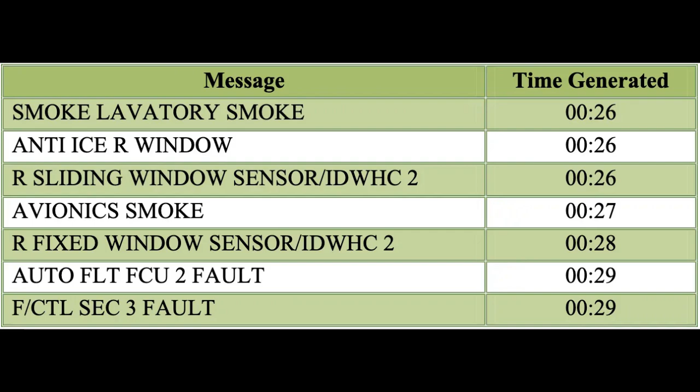The type of ELT fitted to most modern airliners, including the accident aircraft, is designed to transmit an automated distress signal when the device is subjected to a certain level of longitudinal deceleration, in this case between 2.0 and 2.6 Gs. 2 Gs of longitudinal deceleration refers to a reduction in forward velocity that causes objects inside the aircraft to jerk forward with an apparent force equal to twice that of Earth's gravity.

The level of deceleration required to impart such a force is high enough to represent a relatively reliable indicator that the airplane has crashed. Therefore, it seemed reasonable to assume that the activation of the ELT represented the time at which the aircraft impacted the sea.

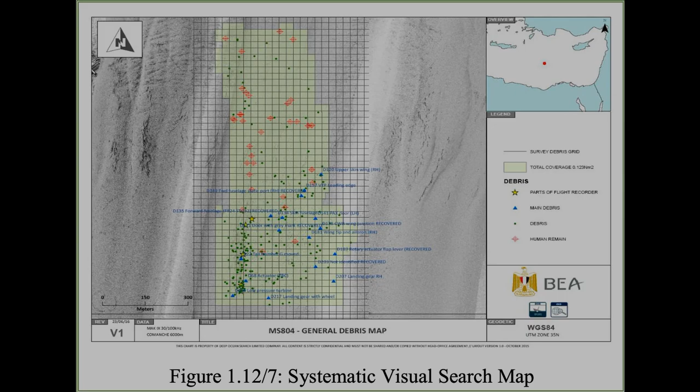From the very beginning, investigators had seriously considered the possibility that Flight 804 was brought down by an intentional explosion, despite the fact that no claim of responsibility had been forthcoming. But the speculation about this possibility came mostly from the Egyptian side, from figures like the chairman of EgyptAir and Egypt's aviation minister. Terrorism had not been officially ruled out, but by the end of the summer, European analysts believed an accidental fire was more likely.

However, on the 16th of September, French newspaper Le Figaro reported that traces of the high-explosive TNT had been found on the remains of several crash victims.

Although some remains were found floating on the surface and others were recovered from underwater, the initial reports did not clarify to which group these remains belonged.

But according to Le Figaro's source, the French investigators wanted to study the remains' chain of custody in order to rule out potential post-crash contamination, only to find these efforts stymied by the Egyptian judicial authorities.

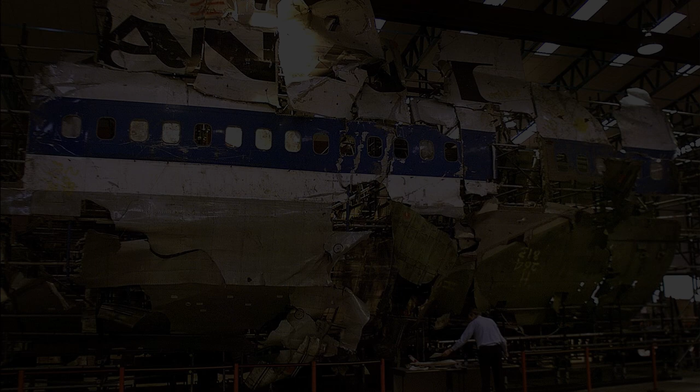Photo of reassembled fuselage of Pan Am Flight 103. Part of the reassembled fuselage following its destruction by a bomb over Lockerbie, Scotland. Reuters.

In the case of Air India Flight 182, the investigation report produced by the High Court of Delhi includes detailed descriptions of various explosive signatures, including numerous small punch-through holes in the fuselage skin with high-energy impact characteristics, small pieces of metal curled in upon themselves by more than 360 degrees, a large number of tiny fragments trapped inside larger pieces of wreckage, greatly different damage in the forward cargo hold versus the aft, distinct metallurgical markers on the fracture surfaces with photographs, replication of damage patterns during experimental explosions, and circumstantial evidence, including a suspicious person who asked for his baggage to be forwarded on Air India Flight 182 without boarding the aircraft himself, and the explosion of another bomb originating from the same airport on the same day, in a bag associated with a reservation made by the same person who failed to board Flight 182.

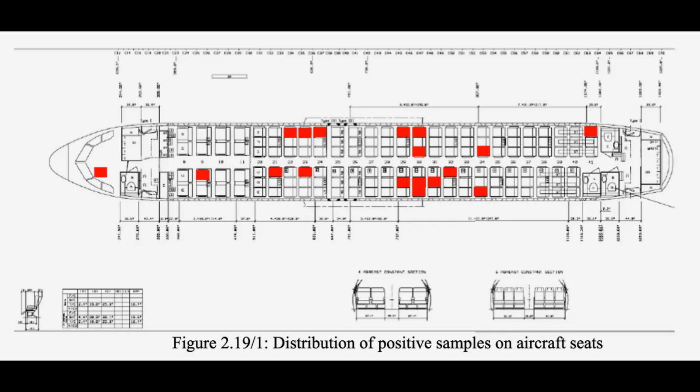The EAAID report includes some basic analysis of all of these items. For instance, the catering trolley was found badly deformed, almost unrecognizable, having been turned inside out and flattened. Regarding this part, the report states the trolley tray tracks were so worn out, probably due to gas wash, without explanation. Gas wash can be a side effect of an explosion, as hot combustion gases change the appearance and properties of metal. However, the report doesn't provide any evidence, such as photographs or surface analysis, that clearly demonstrate gas wash. Nor does it explain what worn out means.

Instead, the report says, quote: '2 sides of 2 trolleys, together with a part of galley composite wall stuck within. This feature is known only to result of the venting of high-pressure gases and rolling over the sharp fractured edge in a direction away from the venting gases.' End quote. I had some difficulty understanding what was meant by this line, largely due to the bad grammar, but...

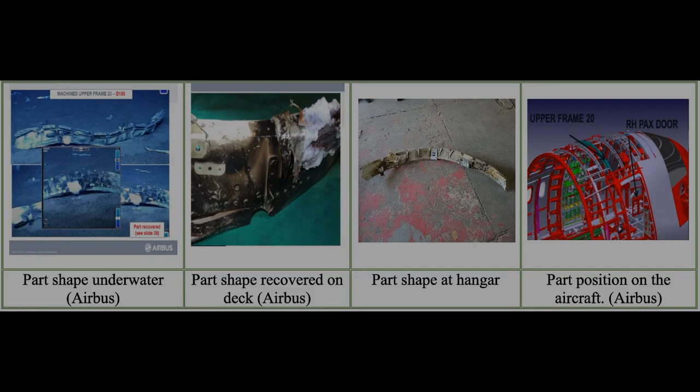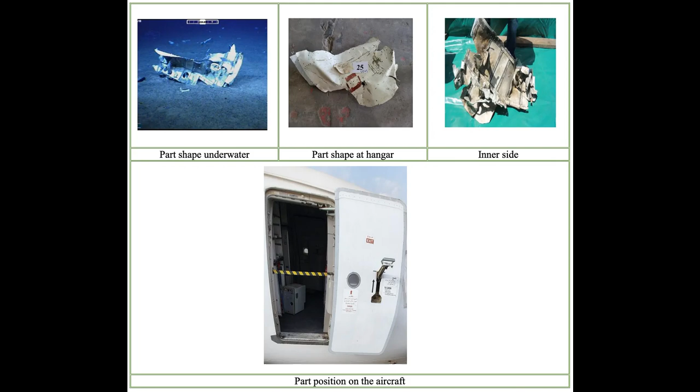The third piece of wreckage mentioned in this part of the report is the upper third of the right-hand forward passenger door, which was completely torn away from the bottom two-thirds. This part displayed what the EAAID calls outward buckling, as well as possible sooting on the interior face. The report cites all of these aspects of the door's condition as evidence that it was exposed to an explosion, but once again, fails to explain why this damage was not caused by an in-flight fire followed by a high-speed impact.

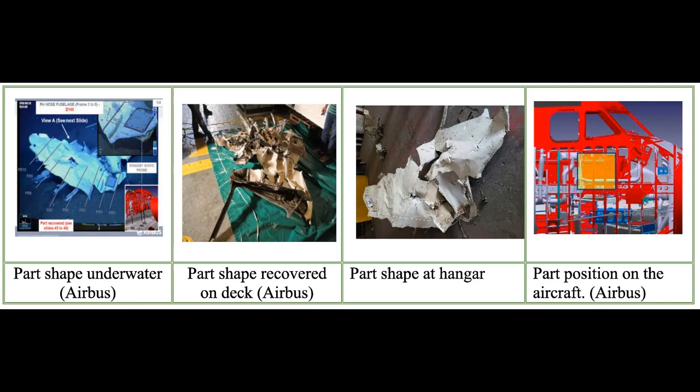The fourth part given special scrutiny is a section of fuselage skin located near the first officer's seat. The report repeatedly highlights intact wiring attached to this part that didn't appear to have been affected by fire or heat. But more detailed photographs in one of the report's annexes tell a different story. Two photos of this wreckage, identified as part number 31, show significant sooting and charring on the interior face, apparent even to the untrained observer. An expert with whom I shared the photos agreed that they represented clear evidence of fire and/or heat damage.

The BEA also agreed with this assessment, listing part number 31 as an item displaying traces of soot and heat exposure in its comments on the Egyptian report. Photo of fire damage on part number 31 is clearly visible in this photo from the report's appendices.

In its response to those comments, the EAAID admits there is soot on part number 31. While it doesn't try to explain this in its report, its response to the BEA comments argues that some fire and smoke could have spread forward after the explosion, but that the fire could not have started here because nearby wiring was undamaged. The BEA wrote that this argument was false and misleading, because the wires in question were located below the cockpit floor level, while the fire damage was above floor level. If the fire started in the right side of the cockpit, this would have insulated the wires from the flames and heat, which tend to spread upward, not downward.

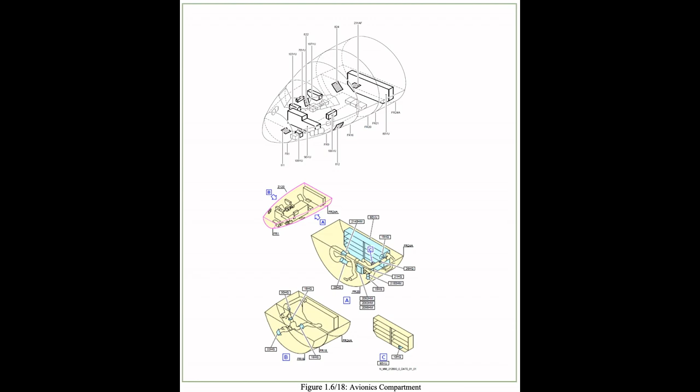As such, the failure of these systems is consistent with damage in that part of the aircraft. It is not, however, proof that the fire did or did not start in the cockpit.

The EAAID also acknowledges that the pilot shouted fire within seconds of the estimated time of the explosion, before there should have been any fire visible in the cockpit. However, the report explains that the pilots must have seen the fire on the video feed from the anti-hijack camera, which provides a view of the area just outside the cockpit door for 5 minutes after any request to enter the cockpit. Since a flight attendant had entered the cockpit less than 5 minutes before the emergency, this camera would have been active and would have shown flames in the galley.

This is an explanation for the pilot's behavior under the proposed scenario, but much like the last several arguments, it doesn't constitute proof of that scenario.

Additionally, the EAAID argues that because there was no attempt by the cabin crew to alert the pilots to a fire in the galley or cabin, that must mean that the flight attendants were incapacitated by the explosion and fire. However, as in all the arguments above, this could also mean that the fire wasn't in the cabin in the first place.

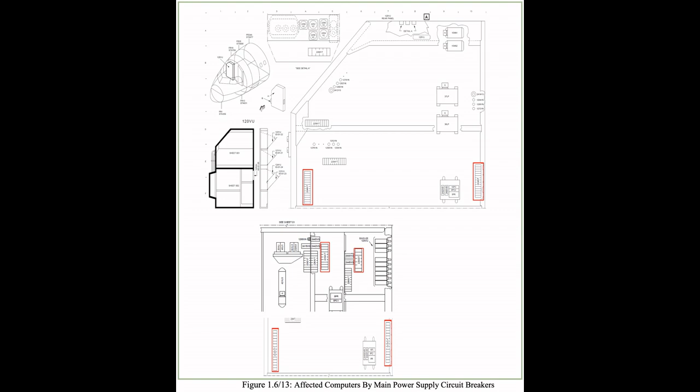Summarizing the Triple Committee report, the EAAID wrote, quote, 'This resulted in oxygen leakage and fire in the cockpit due to the presence of a heat source resulting from the explosion, flammable material, and the oxygen.' End quote. However, it's unclear to me why this argument is used when the EAAID report spends considerable time attempting to rebut the notion that there was a fire in the cockpit at all. Furthermore, the oxygen pipeline is entirely within the area under the cockpit and doesn't extend under the galley.

At the same time, in direct opposition of the findings of the Triple Committee report, the EAAID argues that there was no oxygen leak at all, because if there was, then the cylinder would have emptied faster than it actually did. No evidence for this claim is provided.

The report also argues that even if there was an oxygen leak, this would not cause a fire without an ignition source, which is true. Oxygen simply reduces the amount of heat required to ignite a fuel source. But in the EAAID's opinion, there was no plausible ignition source other than the bomb explosion in the galley. The report points out that the manufacturers of aircraft oxygen systems are required to demonstrate that any mechanical failure or combination of failures resulting in an oxygen-enhanced fire would be extremely improbable.

In the Egyptians' view, this was sufficient reason to exclude an accidental ignition source in the absence of specific evidence for a particular failure. On the other hand, they argued a heat source could be deliberately introduced, and then all bets would be off. In its comments, however, the BEA cautioned that because the probability of a fault is never zero, the EAAID should have written that they had no evidence of a failure rather than arguing that a failure could not have occurred.

When the BEA decided to conduct its own analysis of the fire aboard Flight 804 in late 2022 or early 2023, the investigators would have known that they were being tasked with finding the cause of an accident over which they had no jurisdiction. The BEA had no authority to gather evidence from any Egyptian entity or from the crash site, no ability to re-examine the recovered wreckage in person, and no opportunity to access maintenance records, view historical ACARS data, or consult personnel interviews.

All they had was what Egypt had given them before the two sides stopped cooperating. That included photographs of the wreckage, the technical logbook, and of course the all-important automatic backup of the black box data. Besides these items, the BEA also had access to expertise at Airbus and the oxygen system manufacturer, which were both based in Europe. Using this information, the BEA set out to determine where the fire started and why.

The BEA began its analysis from the most logical starting point, that is, from the first abnormal noise on the cockpit voice recording. Prior to the hissing sound at time 02524, there was no indication that anything was wrong on board the aircraft. A sick passenger had prompted extensive conversations with the cabin crew earlier in the flight, but it appeared that, by the time of the event, this matter had been resolved. Otherwise, there was no indication that the hissing noise was not the start of the accident sequence. As stated earlier, investigators determined that this hissing noise was the sound of oxygen escaping from an oxygen mask.

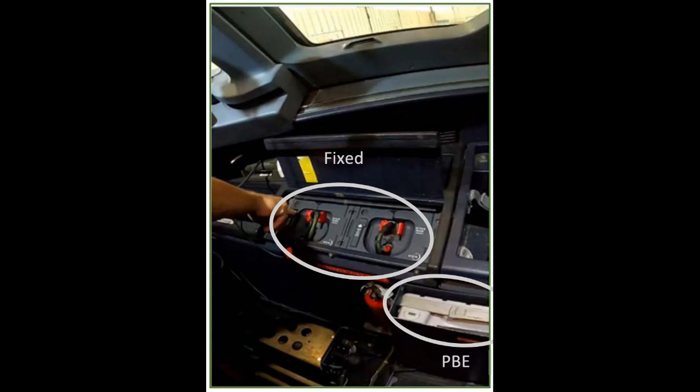Photo of oxygen masks in stowage boxes. Appearance of the first officer's and third occupant's oxygen mask stowage boxes as installed on the aircraft.

Close-up of oxygen box. Note the red handle that the pilot squeezes together in order to lift the mask out through the doors.

Each oxygen mask can be configured to provide oxygen in one of 3 different ways. Using the regulator switch, the pilot can select either normal or 100%. Normal means that oxygen is mixed with the ambient air, while 100% supplies pure oxygen.

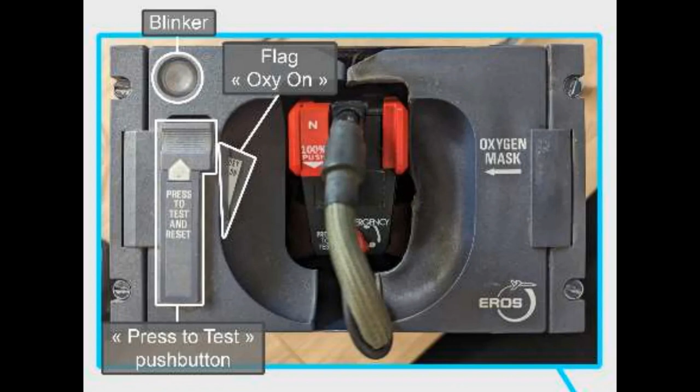Additionally, there is an emergency knob that can be set to either normal or emergency. When set to normal, oxygen is supplied on demand whenever the pilot breathes in, while emergency causes oxygen to be supplied continuously by the cylinder regulator at a positive pressure of 5 bars, which is then reduced by the mask regulator. This can be useful in a smoke emergency because it prevents fumes from entering the mask by creating a positive pressure gradient between the interior and exterior of the mask. However, it will cause the oxygen supply to be expended more quickly.

Location of the emergency knob. The mask also has 2 other features designed to help test its functionality.

The first of these is the Press to Test Reset button on the box, which opens the valve while depressed. Pressing this button also resets the valve to the closed position after the mask is returned to the box following use. When this button is depressed, the mask is in an on-demand configuration, but positive oxygen flow can also be generated at pressure by simultaneously pushing the emergency knob inward. This will cause an audible hissing noise as oxygen escapes from the mask. In either case, when oxygen is moving through the valve, a yellow blinker illuminates on the box.

Pre-flight check procedures require the pilots to verify that their oxygen masks are functioning properly. The checklist for that procedure on the A320 is as follows. Check the Crew Oxy Supply push button on the control panel to verify that the oxygen system is turned on. Check that the loudspeakers are turned on.

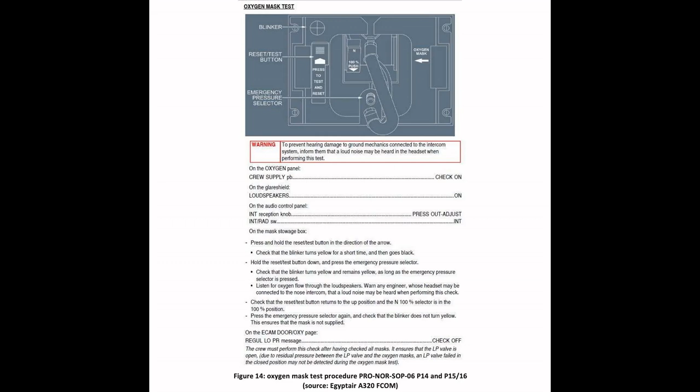According to the accident aircraft's technical log, the first officer's entire mask stowage box was replaced just 3 days before the accident, after the Press to Test button was found stuck. The report doesn't say whether it was stuck in the depressed or normal position. However, the Egyptian report mentions that the new oxygen box fitted to the accident aircraft had previously been installed on another aircraft but was removed due to a faulty left-hand door reset mechanism, a fault that could cause the valve to remain open. The box was overhauled and inspected by a UK-based company prior to installation, but no investigation into this overhaul was conducted.

There had been other problems as well. On March 20th, 2 months before the crash, the crew oxygen cylinder was replaced after the flight crew reported the oxygen quantity was decreasing during every flight sector, presumably due to a leak. Then, the very next day, the cover over the captain's stowage box had to be repaired after a flight crew reported that it was broken. And back on February 17th, the spare oxygen mask was reported inoperative and had to be repaired.

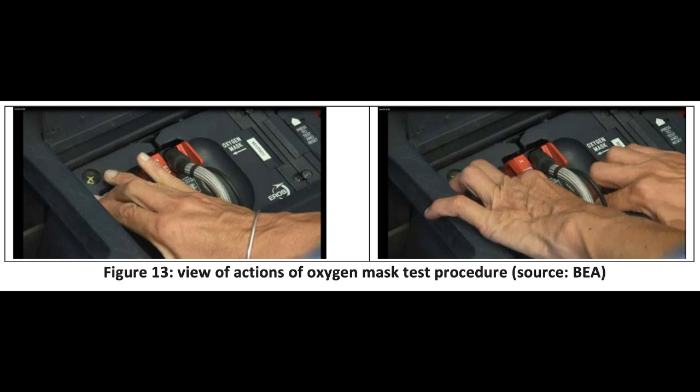The CVR records audio on 4 main channels: one for each pilot, one for the jump seat occupant, and one via the cockpit area microphone, or CAM, which records all ambient noises. Each pilot's channel is actually a composite of either 3 or 4 input sources, consisting of radio and interphone communications, the boom microphone on the pilot's headset, the pilot's handheld push-to-talk microphone, and if activated, the oxygen mask microphone as well. These inputs are integrated before the audio data is written to the solid-state memory in the CVR, so they can't be easily untangled. However, it is sometimes possible to determine which microphone the pilot was actually using based on context.

At EgyptAir, pilots typically wear their headsets up until reaching 10,000 feet, after which they may take them off and use their handheld microphones to make radio transmissions. Incoming transmissions will then be played over the loudspeaker. However, outgoing radio transmissions can only be made from one type of microphone at a time: either the boom mic, the handheld mic, or the oxygen mask mic. The normal order of priority for these 3 input sources is the handheld mic, followed by the oxygen mask mic, then the boom mic. That is, when the push-to-talk button is pressed on the handheld mic, it overrides all other mics. If the oxygen mask mic is active, it overrides the boom mic, and the boom mic only accepts radio transmissions if both other mics are inactive.

Even when the headset boom mic isn't in use, it still records ambient audio. But the oxygen mask mic only records audio when the valve inside the stowage box is open, which means that if the status of the mask microphone can be determined, it can be used as a proxy for the valve position. In fact, that's exactly what the BEA did during its analysis of the CVR.

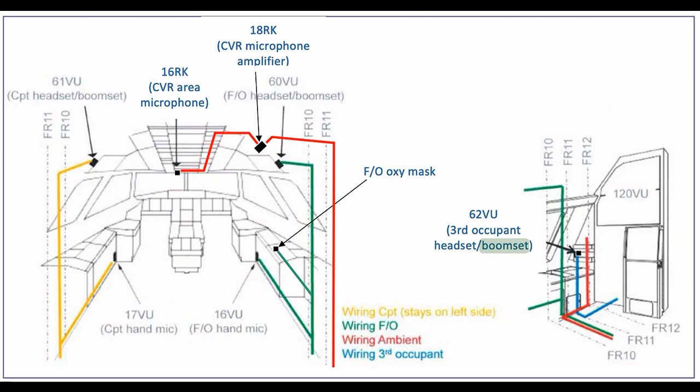While the oxygen mask mic being active would have prevented the first officer from using his headset boom mic for radio transmissions, he wouldn't have realized this, because as the pilot flying, he was not responsible for radio communications.

The implicit conclusion is that the first officer's mask microphone was probably active from the moment the plane departed Charles de Gaulle Airport. Barring an improbable failure of the solenoid, this meant the valve was presumably open that whole time as well. In its report, the EAAID claimed that the mask mic could not have been active because the contents of the two pilots' audio channels were the same.

But since the frequency analysis used by the BEA shows categorically that they were not the same, and the EAAID doesn't present any frequency analysis at all, the Egyptian claim is likely counterfactual and can be disregarded.

The BEA was not able to determine why the first officer's oxygen mask microphone was active using the information provided by the EAAID. It could have been because the press-to-test button was stuck again, or because one of the stowage box doors wasn't closed properly, or it could have been something else nobody has even considered. We just don't know.

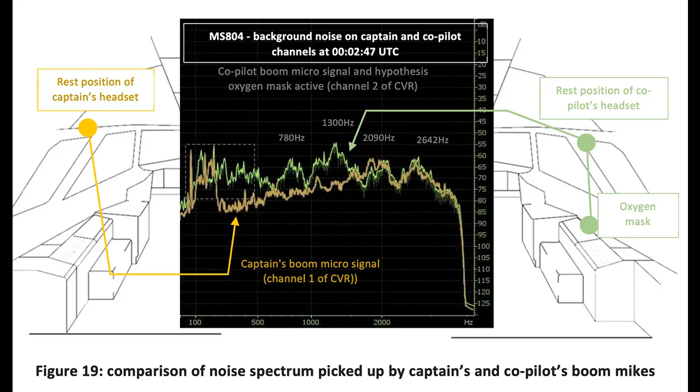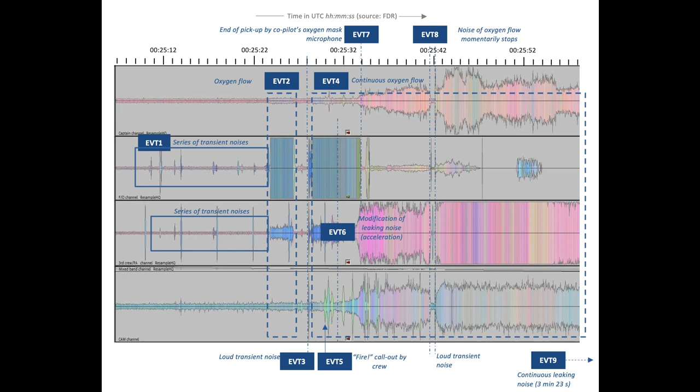Image: audio spectrum analysis of the first several seconds before and after the initiating event. See below for the legend explaining events 1 through 9. Legend for the above image.

Using a crew oxygen system setup in a laboratory environment, the BEA confirmed that the leaking sound most closely resembled a leak from a ruptured hose upstream of the mask, but inside the mask stowage box. However, rupturing the hose didn't produce a sound runaway. In fact, the only way to produce a sound runaway was to ignite fuel in the presence of the oxygen leak, because it turned out that this runaway was the particular sound of components inside the stowage box burning. Evidently, at the time of the sudden leak, a spark was introduced inside the stowage box and a fire erupted.

But where could such a spark have come from? In order to find out, the BEA decided to look back at previous incidents involving oxygen fires in aircraft cockpits. As it turned out, there were several examples, each involving a different aircraft, a different oxygen system, and a different ignition source. So before we continue, let's take a look at some of those incidents and their potential relationship to Flight 804.

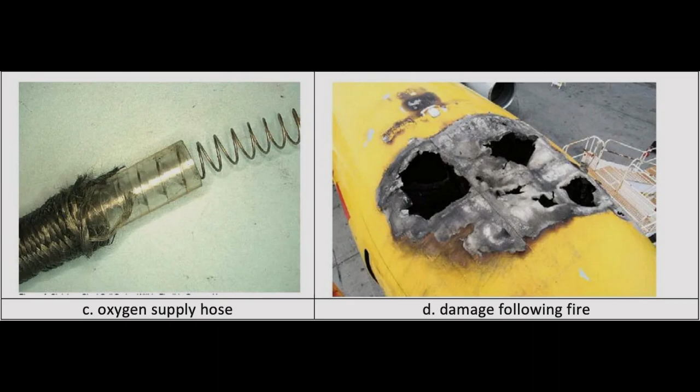In the third incident mentioned by the BEA, a fire erupted in the cockpit of an EgyptAir Boeing 777 as it was preparing to push back from the gate at Cairo International Airport. A pop and a hissing sound were heard, followed by smoke and fire from the vicinity of the first officer's oxygen mask stowage box.

As the cabin crew hurried to evacuate the passengers, the captain attempted to put out the fire with a fire extinguisher, but he was unsuccessful. Although all the passengers successfully evacuated, the fire destroyed most of the cockpit, and the airplane was written off.

The EAAID investigated the accident and found that, while a break in the first officer's oxygen supply greatly worsened the fire, it was not possible to determine whether the oxygen leak created the conditions for the fire to start, or whether an already existing fire suddenly breached the oxygen supply.

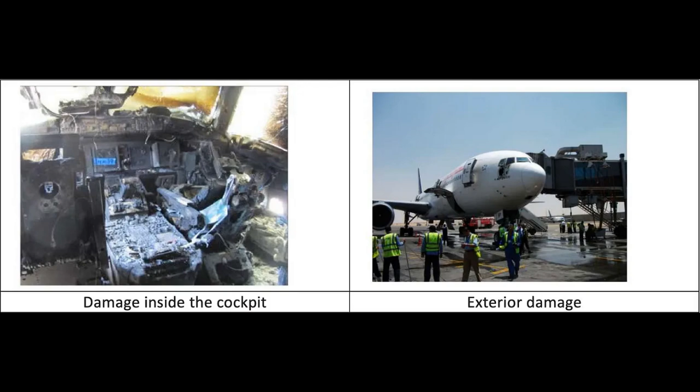The final incident described by the BEA was undoubtedly the most bizarre, but it took place in Turkey, which did not publicly release accident investigation reports until very recently. Information concerning the incident was provided in confidence to the BEA by Turkish authorities. According to this information, on the 14th of October 2012, a Corendon Airlines Boeing 737 caught fire during pushback from the gate in Antalya after a cigarette ignited a fuel source in the vicinity of a leaking oxygen mask.

Apparently, due to unknown circumstances, oxygen was leaking from the mask into the stowage box. Unaware of this developing problem, the captain lit a cigarette. A couple minutes later, the burning cigarette came into contact with some heavy cologne that one of the pilots had brought to the cockpit, causing a fire. The pilots then saw a ball of sparks move through the air towards the captain's oxygen mask, which then burst into flames along with its surroundings.

During the event, the CVR recorded a hissing sound, followed by a pause, and then a sound runaway. The oxygen mask was subsequently found lying on the floor, but it's not clear from the BEA's description whether the captain was attempting to retrieve his mask in order to protect himself from smoke while fighting the fire, at which point the ball of sparks flew toward the mask, or whether he removed the mask from the box after the ball of sparks flew toward it, in order to stop the fire. It's possible that it was the latter, because the captain reported trying to squeeze the oxygen tube shut with his bare hands. Needless to say, he did not succeed.